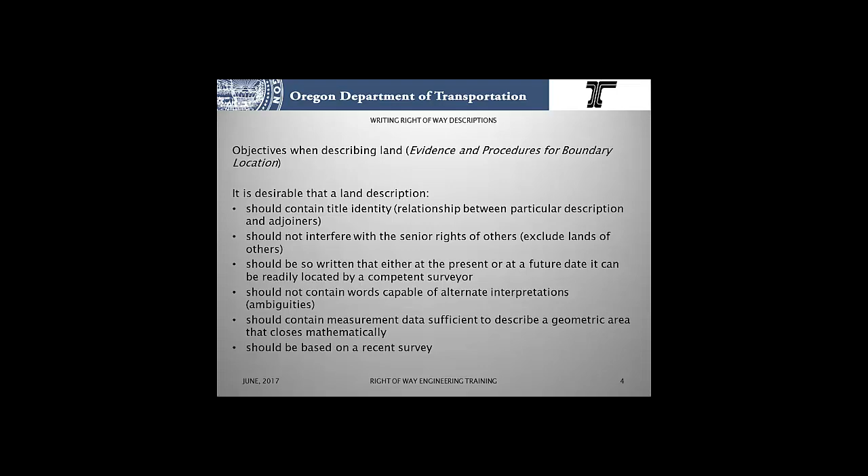It should not contain words capable of alternate interpretations. Those are ambiguities. Should contain measurement data sufficient to describe a geometric area that closes mathematically and should be based on a recent survey.

We get into the law, 93.310, Rules for Construing Description of Real Property. So the following are rules for construing the descriptive part of a conveyance of real property when the construction is doubtful and there are no other sufficient circumstances to determine it.

So number one, where there are certain definite and ascertained particulars in the description, the addition of others which are indefinite, unknown, or false does not frustrate the conveyance, but it is to be construed by such particulars if they constitute a sufficient description to ascertain its application.

Basically, if reading the deed, you can determine the description of what it is describing, it's a good deed, even if there are some aspects which are in error. If you can still construe what the deed is describing, it's a good deed.

When permanent and visible or ascertained boundaries or monuments are inconsistent with the measurement either of lines, angles, or surfaces, the boundaries or monuments are paramount. You hold a monument, you hold a call to a boundary, say, to the west line of Jones's property.

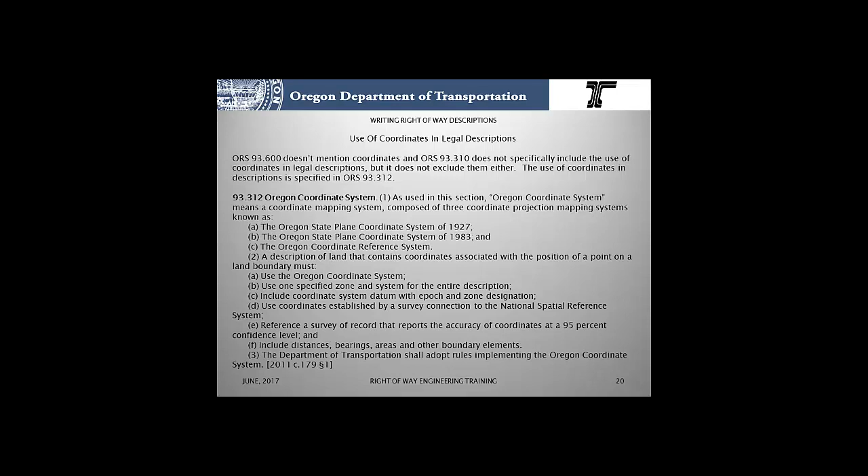So as used in this section, the Oregon Coordinate System means a coordinate mapping system composed of three coordinate projection mapping systems known as: the Oregon State Plane Coordinate System of 1927, the State Plane Coordinate System of 83, and the Oregon Coordinate Reference System, that's the OCRS. So NAD 27, NAD 83, and the OCRS.

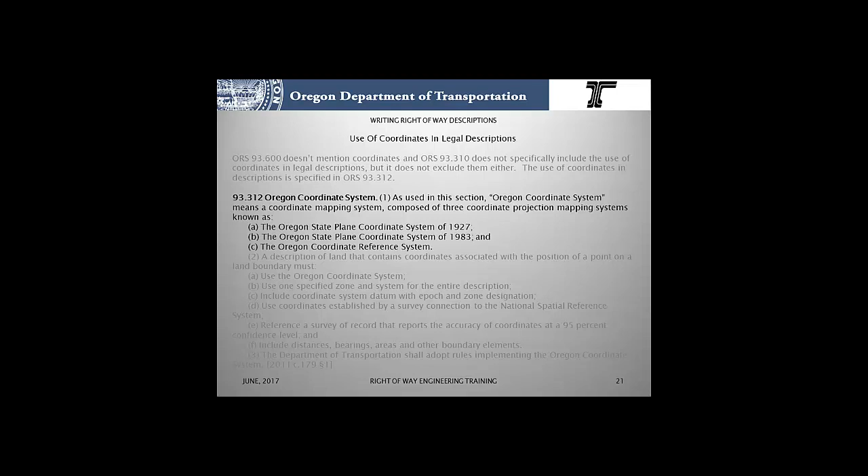A description of land that contains coordinates associated with the position of a point on a land boundary must: A, use the Oregon Coordinate System, one of those three systems defined above. Use one specified zone and system for the entire description. Don't mix and match. Include coordinate system datum with epoch and zone designation.

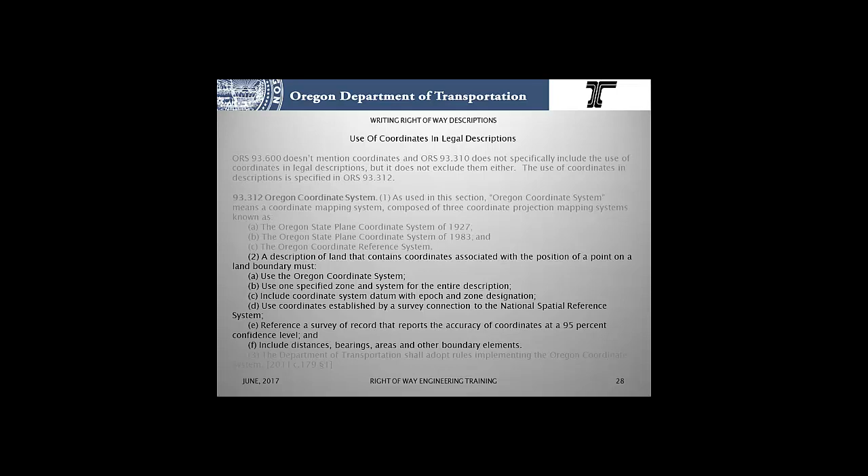And use coordinates established by survey connection to the National Spatial Reference System. And E, reference a survey of record that reports the accuracy of coordinates at a 95% confidence level. And finally, it must include distances, bearings, areas, and other boundary elements. So you can't use coordinates exclusively in a description. However, current ODOT preference is not to use coordinates in the legal descriptions.

Parts of a description. This is per boundary control and legal principles. The caption cites the general locality, the map number or reference document in city, town, county, or state, and other matters of general interest. The body identifies a particular land area within the locality designated by the caption. Qualifying clauses, including reservations, take away something included within the body, and augmenting clauses may give something in addition to what was conveyed in the body, such as an augmenting easement for ingress and egress.

Parts of the descriptions: all descriptions are going to start wide in the caption. You have a generalized locality, then it narrows it down to a specific area, say part of that property in this particular deed. Identifies that, and then we further qualify it or augment it. Most common types of descriptions, again from boundary control and legal principles: we have the perimeter description, description by bounds, a strip description, that's our preference, description by reference, that includes aliquot parts of a section, or combinations of these.

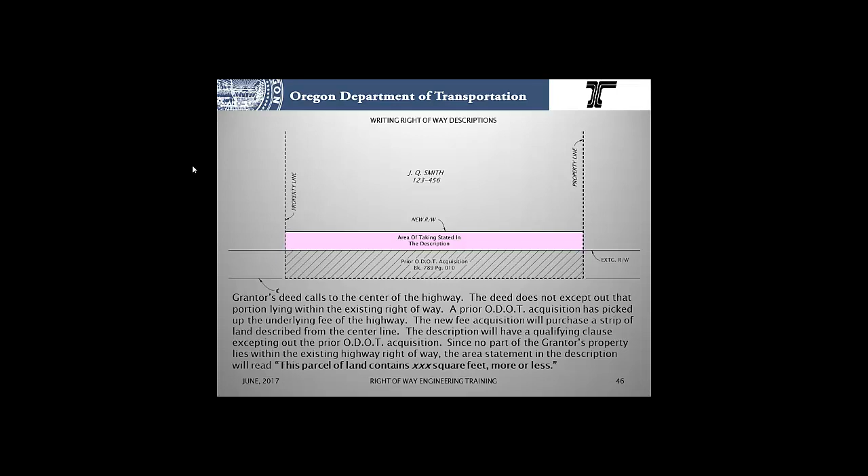The new acquisition will purchase a strip of land described from the center line. The description will have a qualifying clause that excepts out our prior acquisition. Since no part of the grantor's property lies within the existing highway right-of-way anymore, the area statement in the description will just read, this parcel of land contains X number of square feet, more or less.

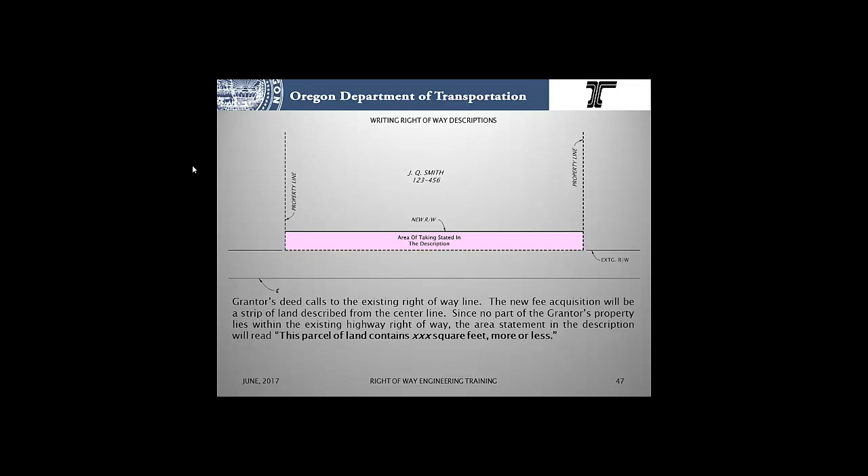Third scenario: the grantor's deed calls to the existing right-of-way line. The new fee acquisition will be a strip of land described from the center line. Since no part of the grantor's property lies within the existing highway right-of-way, the area statement is going to say this parcel of land contains X number of square feet, more or less.

Okay, qualifying clauses, that includes reservations, take away something included within the body of the description. We like to note that using the words except and also except. So except therefrom, also except therefrom. An example here: except therefrom that property described in that warranty deed to the State of Oregon, with the deed reference, or most common, except therefrom Parcel 1.

Now, augmenting clauses may give something in addition to what was conveyed in the body. We use the words also that portion, and also that portion. In this case, also that portion of vacated Lake Street inuring to said Block 4, as described in that order of vacating streets.

Now, the preferred method for writing descriptions for ODOT acquisitions is the centerline strip description. This method lends itself well to a highway corridor and has a long association with the agency dating back to the beginnings of the highway division. Other types of descriptions may be used if a strip description does not fit well with the situation. So standard types of descriptions are centerline strip, described line, described tract, metes and bounds, and description by bounds.

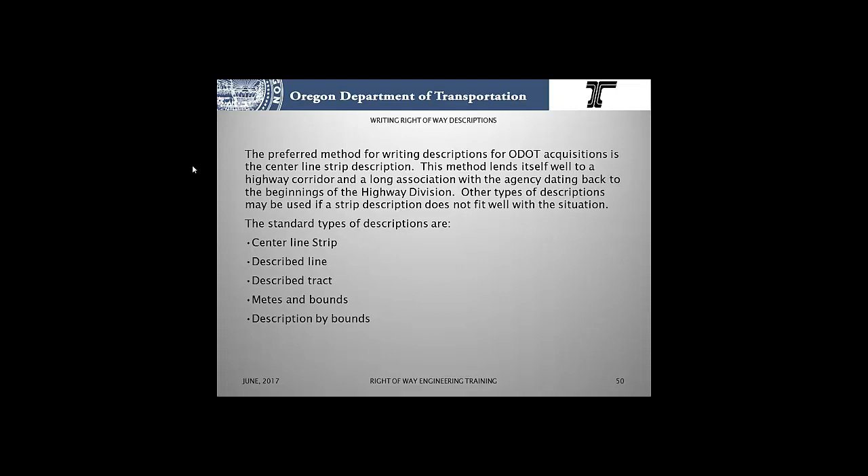The described centerline. The centerline that the acquisition parcels are referenced to will be described in the description. The description will begin at a specified engineer station on the centerline. The engineer station will be tied to a section corner, quarter or 16th section corner, donation land claim corner, or subdivision lot or block corner. These are the monuments in the public land survey system. Traditionally, this tie will be cardinal directions from the PLSS corner: north, south, east, or west.

The courses of the alignment are then given along the tangents and curves to the ending station. Lengths of spirals and the central curves are stated along with the radius of the central curve and chord bearings and chords of both the spirals and central curve. We're beginning at engineer station W10+00, and this station is 1,096.64 feet south and 1,929.98 feet east of the southwest corner of the Jesse Harritt DLC No. 67. So then we've got that beginning point.

Then we have our beginning tangent, north 21 degrees 30 minutes 38 seconds west, and the distance 468.27. Then we go through a spiral. We have a 100-foot spiral curve, and we give the chord bearing and distance of the spiral. Then we go into the central curve. We state the radius, 954.90 feet, and we give the long chord of the central curve and the distance. So north 15°25'52" west, 102.59 feet, and of course the distance of the central curve along the arc, 102.64 feet.

Then we have the spiral out, and we tell what direction it is. So it's a curve to the right or a curve to the left if you're running along it facing the direction of travel. On the spiral out, we give the spiral chord and distance and the length of the spiral. And then in this case, we give a tangent bearing out. It's a half a foot to an equation station. Then we continue on to the ending station, which is W33+00.

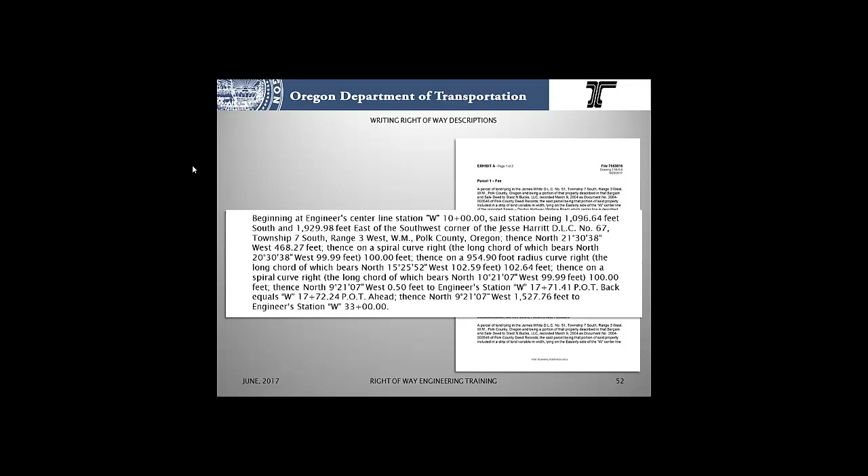Our center line need only be described once in the description. When multiple parcels are described using the same center line, it will be referenced. So in this case, center line of the relocated McKenzie Highway referred to herein is described in Parcel 1. A description may be written using a center line which is described in another deed. The deed that the center line is described in will be referenced in the parcel description. This most often occurs in ODOT descriptions of surplus property sales.

So, example: and included in a strip of land 60 feet in width lying on the southerly side of said center line, which center line is described in that deed to the State of Oregon, by and through its State Highway Commission, and then the book and page.

Equations that occur along the highway center line alignment are noted in the description of the center line. In this case, coming out of the spiral curve, we're going a half a foot to engineer station W17+71.41 POT back equals W17+72.24 POT ahead.

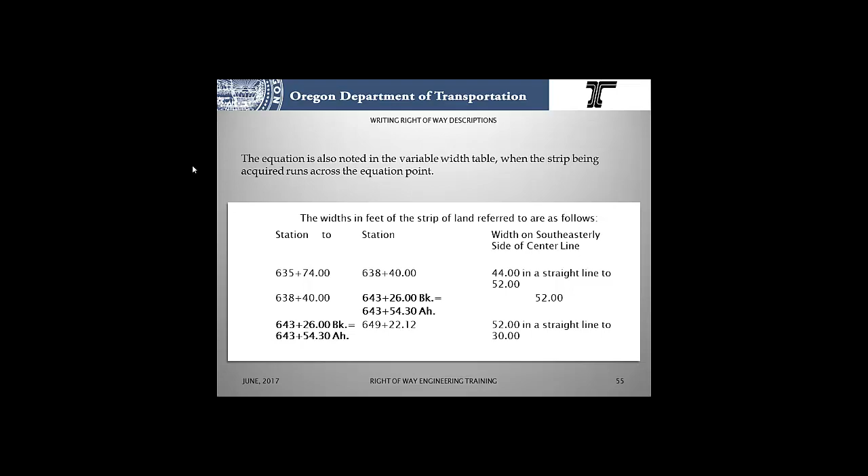So the example here, we have 638+40 to 643+26 back equals 643+54.30 ahead. And we get the width, constant width, 52 feet. And then the next call has that same equation station and then goes on ahead.

Strip descriptions are either a constant width or a variable width. So an example, strip with a constant width: said parcel being that portion of said property included in a strip of land 40 feet in width, lying on the southerly side of the center line of the relocated Corvallis-Lebanon Highway, which center line is described as follows.

Okay, here's an example of a variable width table in the description. So said parcel being that portion of said property, included in a strip of land variable in width, lying on the southerly side of the center line of the relocated Corvallis-Lebanon Highway. And then we have the width table.

A variable width table in a description can at first be difficult to interpret. Keep in mind that each call in the table is a segment that defines a specified width from the center line between specified engineer stations on the center line. This segment can either be a constant width or a changing width. The following slides will illustrate how a variable width table works, and actually it's very, very simple.

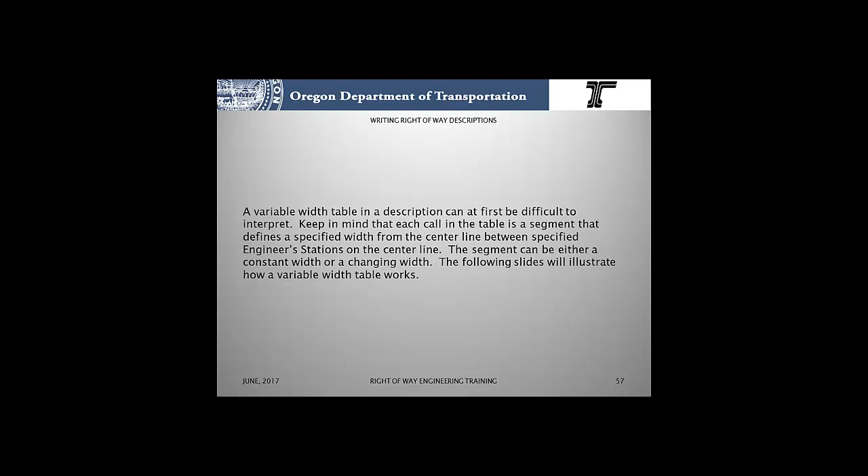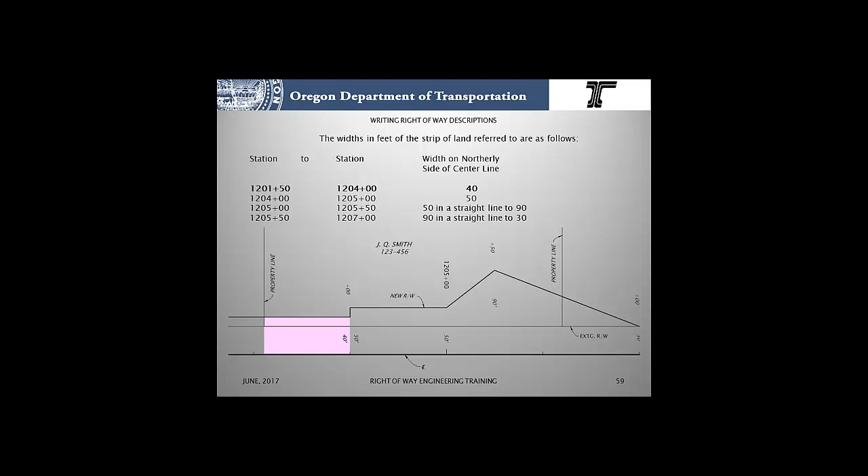So here we go. Here's our variable width table and a clip from the right-of-way map showing the takings. Now, the first segment in the table is from 1201+50 to 1204+00 with a width of 40 feet, constant width. However, we're only acquiring from within the grantor's property, so the actual segment is just from this property line up to 1204+00. 1201+50 is beyond the grantor's property line.

Now, the second segment is from 1204+00 to 1205+00 with a width of 50 feet. Still constant width. We now have 10 feet additional, so we have a right angle jog in that taking. You do not need to put a segment in there that says 1204+00 to 1204+00, 40 in a straight line to 50. Remember, we're defining segments between station bounds.

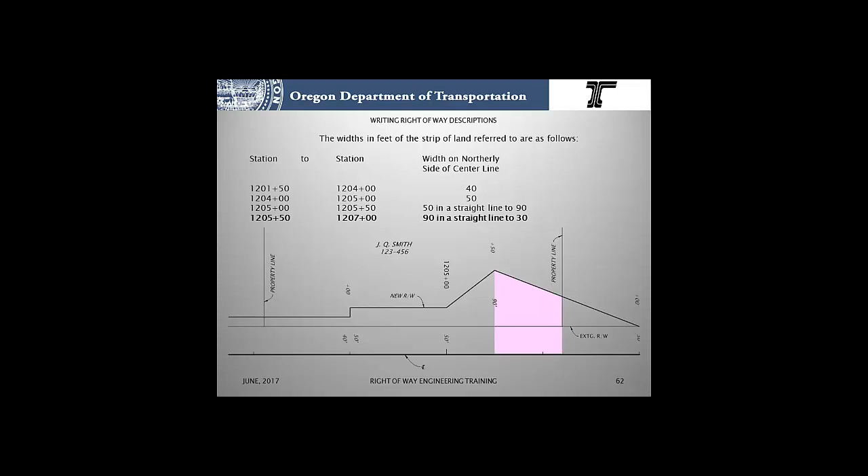So the third call, 1205+00 to 1205+50, we're variable width now. We're going 50 in a straight line to 90. And the last call is 1205+50 to 1207+00, 90 in a straight line to 30. The last call, 1207, again is outside of the grantor's property, so the actual segment is just between 1205+50 and the property line.

The segments of the table taken together as a whole define the property described in the body. Because the widths are stated from the center line, the existing right-of-way is included in the parcel. The existing right-of-way may be taken out of the parcel in a qualifying clause depending on the circumstances.

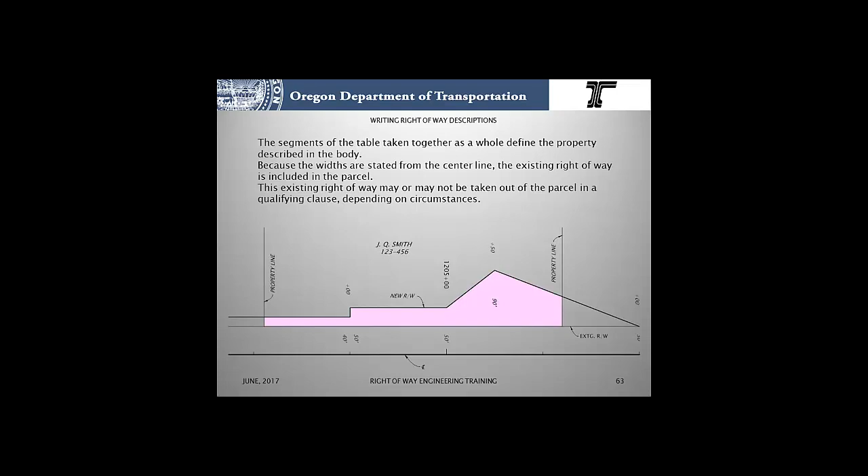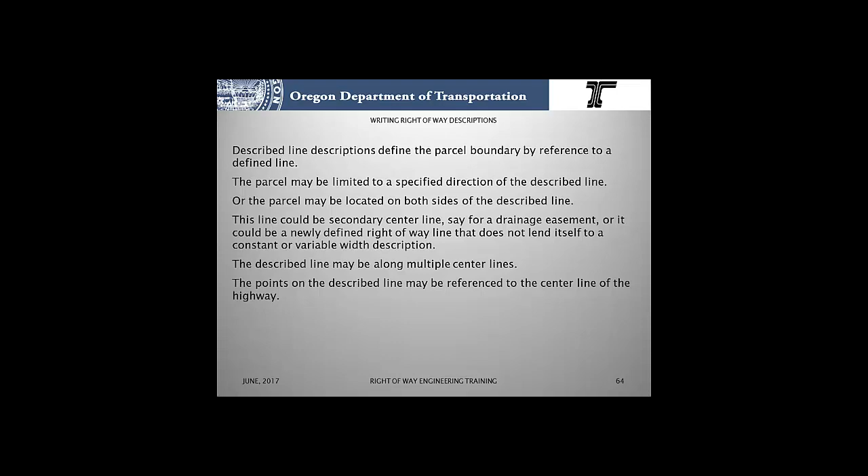Now, described tract descriptions differ from the described line in that the description defines a closed shape and is similar to a metes and bounds type of description. This type is used for irregularly shaped tracts that cannot be described by a center line. For example, when the shape of a tract changes direction and it runs backwards along the center line.

So normally with a strip we have a width table, but it's running always forward ahead on line. But when you go backwards, the width table obviously won't work. So use a described tract. The points on the tract are usually defined in relation to the center line, and the parcel may be the entire tract or only a portion lying within the tract. That's where it differs from a metes and bounds.

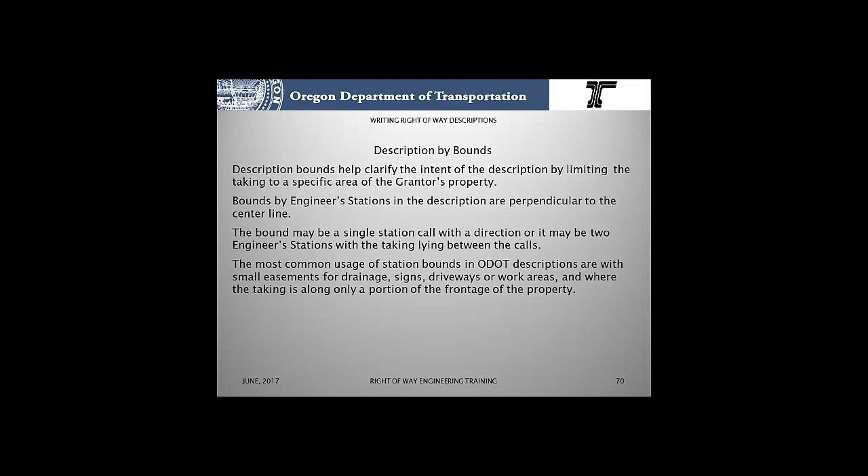Description bounds help clarify the intent of the description by limiting the taking to a specific area of the grantor's property. Bounds by engineer station in the description are perpendicular to the center line. The bound may be a single station call with a direction, or it may be two engineer stations with the taking lying between the calls. The most common uses of station bounds in ODOT descriptions are with small easements used for such as drainage or signs, driveways, work areas, and where the taking is along only a portion of the frontage of the property.

Some examples. First one, being that portion of said property lying northwesterly of a line at right angles to the center line of the highway at station 1150+50 and included in a strip of land variable in width. So we bounded that by that station and a variable width taking. Second example, that parcel being that portion of said property lying southerly of a line at right angles to the center line of the relocated Lower Columbia River Highway at station 34+

909.863. Third example, said parcel being that portion of said lot lying between lines at right angles to the "H" center line of the relocated Pacific Highway West at stations 25+945.747 and 25+953.747 and included in a strip of land 18 meters in width, lying on the northerly side. So that one, we bounded it by two stations, strip of land 18 meters in width, and the direction from

the center line. The last example, that portion of the property lying westerly of a line which is parallel to and 121 feet easterly of the center line of the relocated Pacific Highway and northerly of a line drawn at right angles to said center line at engineer station 216+25.